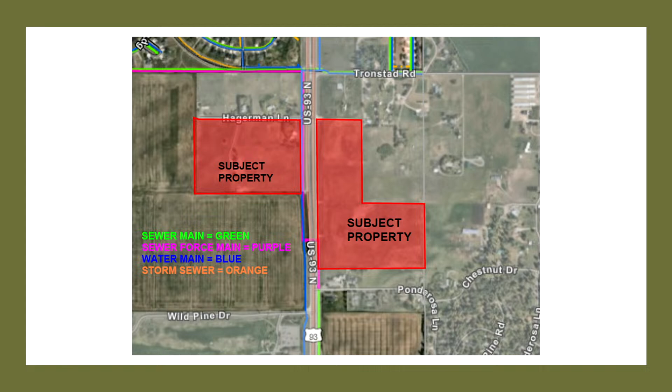With that, the Kalispell City Planning Board and Zoning Commission adopted staff report KA 2307 as findings of fact and recommended that the Kalispell City Council annex the property and that the zoning be City R4 residential. Be happy to answer any questions.

Any questions? There's two parts to this, right? Yeah, so there's going to be the resolution and the ordinance. Correct. Questions for all of it? I don't have any questions, but just that.

Okay, all right. At this point, I'll open it up for public comment. Any public comment wishing to speak, please step to the mic and state your name and address. Okay, seeing none, I'm going to close public comment and look to the council for a motion on the resolution. Ms. Gabriel?

Thank you, Mr. President. I would move resolution number 6174, a resolution to provide for the alteration of the boundaries of the city of Kalispell by including therein as an annexation certain real property generally described as being located on the west side of Highway 93 North to the south of Hagerman Lane and adjacent to the city limits on the south and west sides of the property, including but not limited to property addressed as 170, 180, 190, and 200 Hagerman Lane, and also including property on the east side of Highway 93 North, generally between Hagerman Lane to approximately 200 feet north of Ponderosa Lane, including but not limited to property addressed as 3327 Highway 93 North, and as further described on Exhibit A, to be known as Dusty Acres Addition number 468, to zone said property in accordance with the Kalispell zoning ordinance and to declare an effective date.

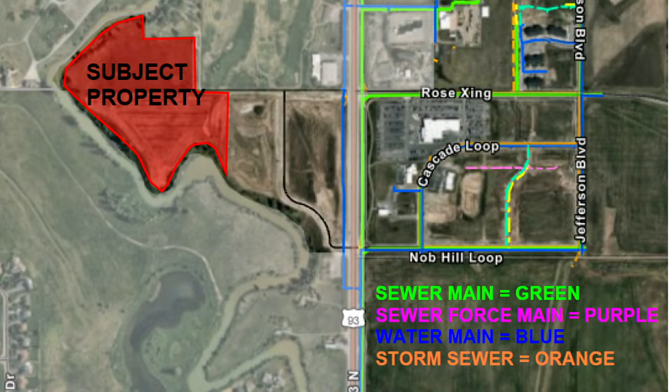Just a shot of the property. It is zoned RA2 with a placeholder PUD. The property is designated as urban mixed use in the growth policy, which is consistent with the existing zoning. The growth policy encourages a variety of residential development that provides housing for all sectors and income levels within the community. Under the growth policy, up to 40 units per acre are allowed.

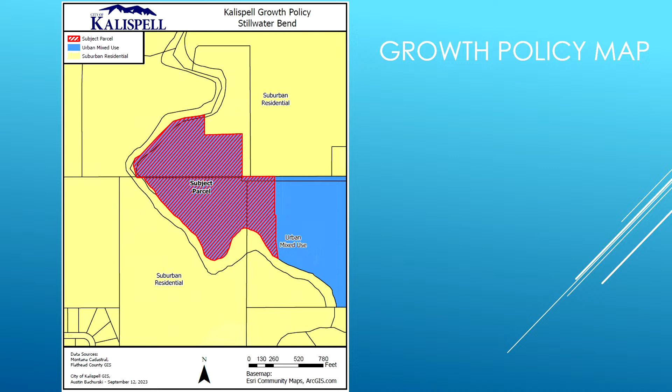The proposed density for the project is calculated for developable land only. In this instance, the 23 1/3 acres of developable land would generate 18.5 units per acre.

Under the subdivision regulations and fire code, a second access in addition to Rose Crossing must be provided once there are 100 or more units. Eventually, it's anticipated that Rose Crossing would continue across the river, with that extension providing the second access in the long term. A separate second access is necessary in the short term, and the plans show that it is part of the initial phase of Stillwater Bend Phase 2.

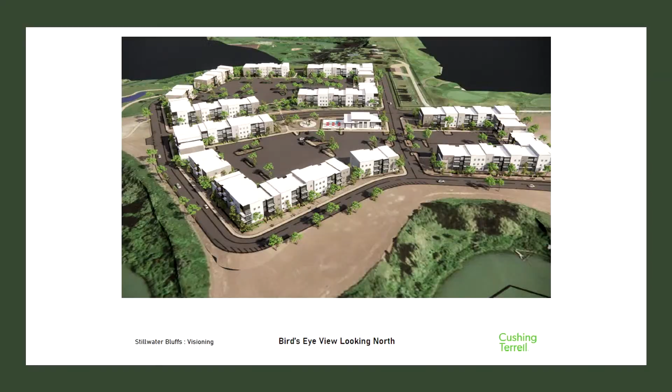This is a 3D image of what we were just looking at with that layout, along with some perspectives of the clubhouse, as well as a view running down Rose Crossing.

They did request 2 zoning deviations and 2 subdivision deviations. For zoning, there was a setback request to drop from 15 feet to 10. The reduced setback is requested to help accommodate site constraints relative to slopes, the river, and the 80-foot minor arterial right-of-way that bisects the property. The reduced setback to 10 feet doesn't interfere with the street or utility easements and allows for the urban appearance desired by the applicant. In this situation, the deviation request is appropriate.

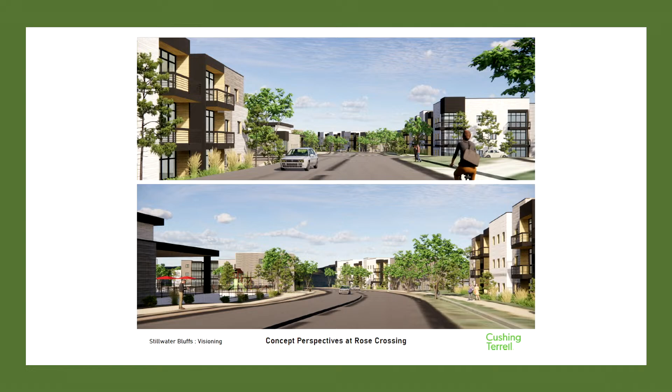The second deviation is building height. The RA2 zone has a maximum height of 45 feet, and the requested deviation would allow a maximum height of up to 60 feet for the buildings shown in the western portion of the development. The request is primarily to accommodate the natural grades of the site and to provide the option for tuck-under parking on those buildings. Additionally, the height deviation would allow a continuation of the varying roof lines shown in the proposed elevations. Building heights through the remainder of the development will be approximately 42 feet, and it would be appropriate to allow this deviation as well.

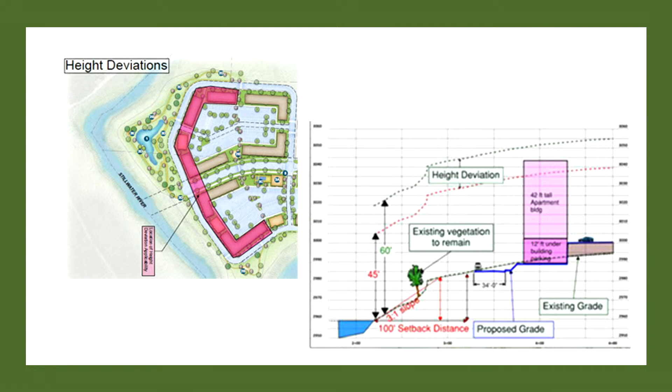The 2 deviations from subdivision regulations related to the setbacks from the river and access to adjacent properties. In regard to setbacks from the river, the subdivision regulations require a minimum 200-foot setback for impaired streams, including the Stillwater River. The setback is measured from the ordinary high water mark.

The setback can be reduced per the terms of the ordinance based on sound scientific information and reasonable mitigation to address potential impacts. In the case of bank stabilization, a geotech report shall be required. There were detailed findings relating to this aspect of the approval of Phase 1 of the development, which should be

reaffirmed in the Phase 2 findings and are outlined in the staff report. While there are riparian scrub shrub areas along the riverbank, there were no identified wetlands adjacent to the property and only the river setback would apply.

While Phase 1 is a separate PUD, the request is essentially for a continuation of the previously approved deviation that applied to the first half of the site due to similar site conditions and based on a 2017 geotech study of the full site conducted by Slopeside Engineering.

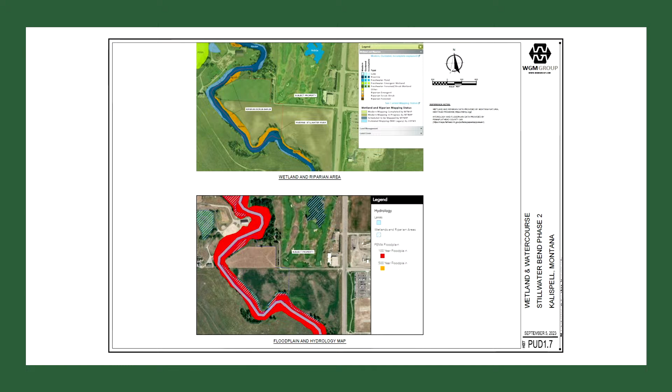The conditions of approval for Phase 1 included: A, allowing a reduction in the Stillwater River setback from 200 feet to the setback line determined by the geotech report, provided that the setback could not be less than 100 feet. B, requiring the 100-foot Stillwater River setback be restored with native riparian habitat. A landscape plan would be submitted by a specialist with experience in riparian area restoration.

And C, providing that as part of the engineering review process, the City of Kalispell would have the option to submit the geotech analysis to a third party.

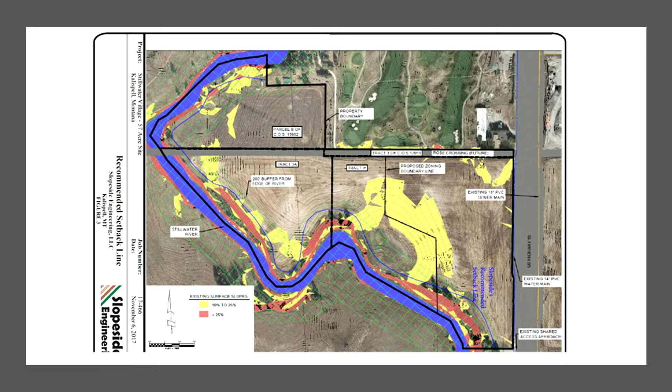This is showing the 2017 geotech as well as the current conditions.

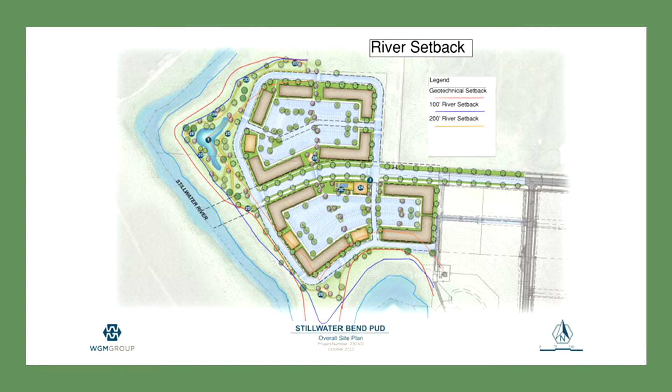As part of the application for Phase 2, the prior geotech report was reviewed by Slopeside Engineering and determined to still provide valid information. The applicant provided additional exhibits that add further detail to the Phase 2 area relative to the proposed construction. The exhibit here shows the recommended geotech setback in red, the 100-foot setback line in blue, and the 200-foot setback line in orange.

This exhibit shows areas where the development would encroach into the 200-foot area. It should be noted that trails, stormwater facilities, parks, and similar improvements are allowed in the setback under the subdivision regulations. So mainly you'd be seeing these areas in kind of that purplish blue coming around in those 3 locations.

And this exhibit shows the cultivated area within the 200-foot setback, which has occurred as close as 40 to 50 feet from the river and has contributed over time to its impaired status. The restoration plan required as a condition of approval would improve the current situation as it relates to the health of the riverbank due to the cultivation activities.

Additional information specific to the area of the development is still warranted to verify details related to the riverbank and slopes through the phase, and any updates to the geotech report required by Public Works should be submitted and subject to their review. Based on the additional information, adjustments to the site design, and a potential reduction in the number of units may result based on those updates in the reports.

Subject to the foregoing, it is appropriate to apply the Phase 1 conditions relative to the watercourse setback to Phase 2, and the deviation request is appropriate.

Lastly, there was the block length and connectivity. Generally, future street extensions to adjacent properties should be laid out at regular block lengths of no more than 600 feet. In this particular case, with the river extending through, they have the one connection with the bridge. Probably not reasonable to have additional ones and could impair the river more than you'd want in any case.

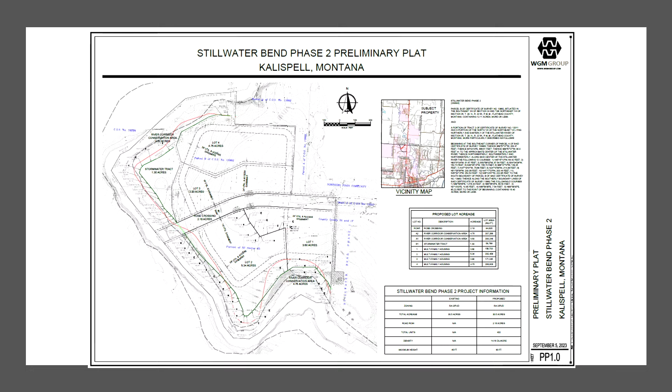This is just showing the plat and the phasing, with Phase 1 starting on the eastern end, moving to Phase 2, 3, and 4. Phase 1 would include that second connection, as well as the stormwater area on the western tip of the property.

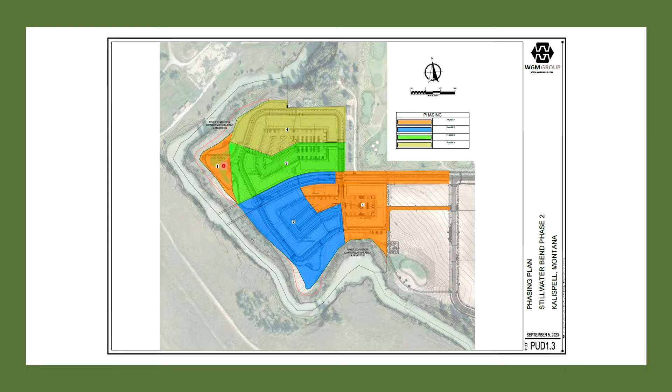No public comments were received at the public hearing other than those from the applicant, and the Kalispell City Planning Board and Zoning Commission did adopt staff report KPUD 2303 and KPP 2309 as findings of fact, and recommended that the Kalispell City Council approve the planned unit development and preliminary plat for Stillwater Bend Phase 2, subject to 35 listed conditions.

There were some slides that the architect and engineer for the project had to go through. If you would like to look at those either in the public portion or now. We do it in the public portion of it.

I think it's a really good presentation to put out there because it shows where the vision came from. We had done it one time before on one of their other projects too, and I think it's nice to have. So, are you guys good with that? Okay. So with that, if there's any questions, I'd be happy to answer those too. Any questions?

Ms. Dahlman? Thank you, President. I mean, you probably don't know this, but...

When would Rose Crossing possibly cross that river? I guess it's a little speculative at this point. Nobody's been in to talk to us about that. There's a gravel pit over there, and whenever they try to remediate that, you'd probably see something extend through at that point. So it's probably quite a ways down the road. Okay, that would be a public project though, right? Not a privately funded effort. In some ways, it's hard to speculate because you don't know what the plans would be there in the future.

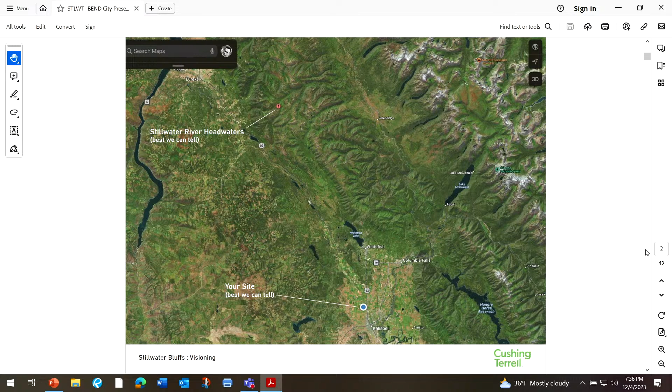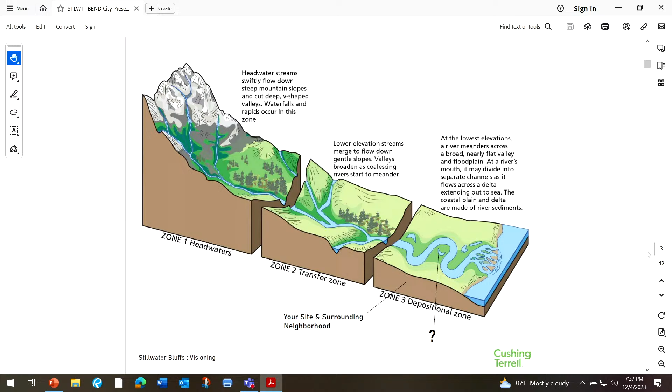We noticed some interesting little curves and things. The next slide shows what those are. Those are oxbows—a lot of people are hunting ducks and things at oxbows. There's a few around our site, and there's even one basically on it. We started thinking architecturally, how can those shapes actually help shape to some degree what the buildings might look like?

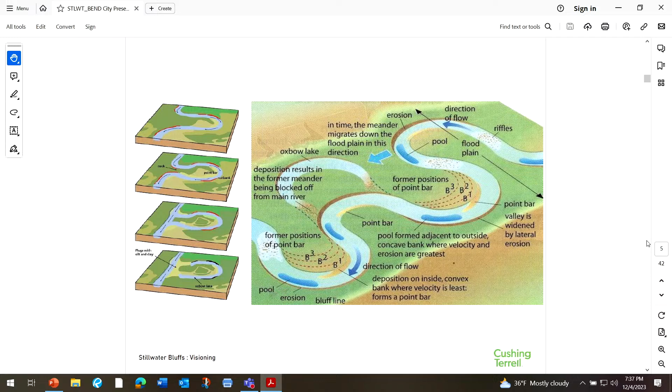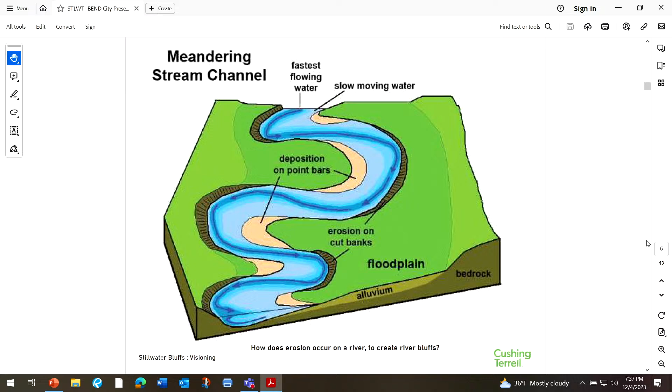It's kind of interesting, and the next slide shows how the river naturally speeds up as it wraps those outer curves, and it actually erodes and creates those cut banks, if you will. We thought maybe there's something we could learn from banks as well as we think about the architecture. So we got some cut banks as well—areas where, in fact, Geotech even said some of these you got to stay away from because naturally this is where the river is going to continue to carve away. We just got to be careful of that.

We also just looked for fun at research of how other people are dealing with riverfront properties. We haven't quite gotten to the design here yet, but just know we really want to focus—we have a lot of land that's right on the water that we actually can't develop, so we're just going to develop it into fun green spaces as time goes on here. It's going to be really exciting to do that.

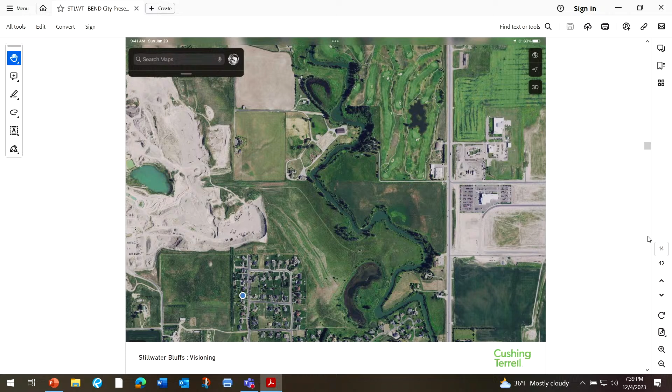This goes back to the base, and then as you flip ahead it starts to show some squiggles, and the purple lines start to show curves and things, thinking what can we do on our site that we can utilize that form, that sort of external form. You can see almost the form of an oxbow—it actually kind of creates this panoramic look, if you will. It pretty much represents a panorama, and it also encloses a space inside it. We started to think, how can you use that?

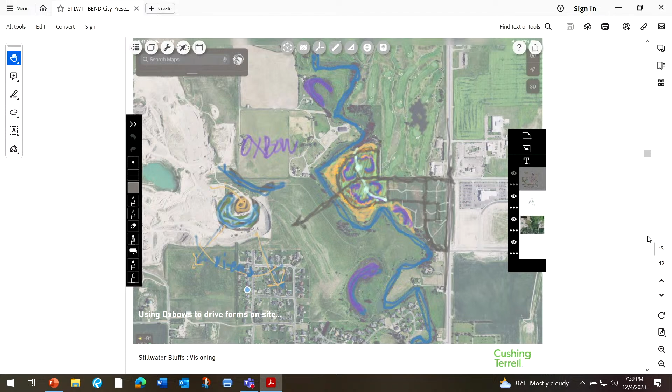We flip to the next one and work it into geometries as opposed to curves, because as we know, curved forms are much more expensive than square forms. So we didn't want to do a bunch of curves as much as the architect wanted to—the owner didn't want us to do that.

So we started looking at other forms that are actually constructible, and how do we push those forms right to the edge? What you're seeing here is essentially a ring of architecture facing the waterfront, the mountains beyond, and even up to the north and northeast to Glacier and Whitefish Mountain. The best way to take advantage of the views is to wrap the edges of these sites with the buildings, and we'll do our best to contain and create some beauty.

The buildings are far enough away that I think even the views that are internally focused will be able to look between and beyond and above the buildings because of the distance. So it's just a different way to look at it as opposed to building, parking, building, parking, building, parking. Let's find a way to take advantage of the site.

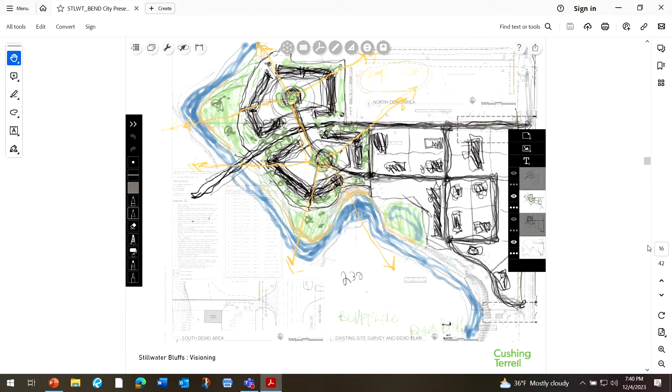So moving on to the next one — I'm surprised you didn't flip ahead, PJ. That's intentional. This is just showing, stepping through literally. The light green represents a certain grade, and then we start dropping down and down. You can see the dark green is area we aren't even touching with buildings because it's just too low.

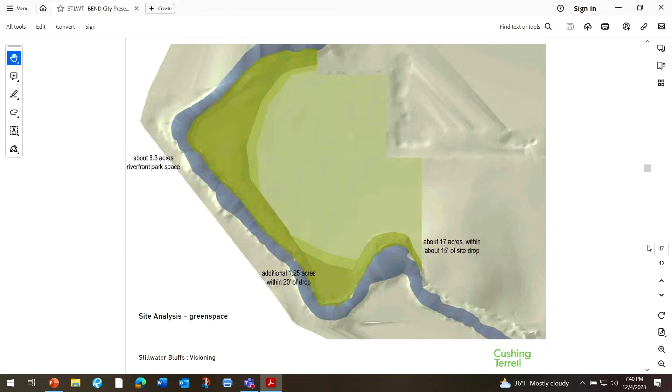So a great deal of acreage is being devoted to green space. The next one shows geotech, basically where we've been told to stay away from because of the erosion. The next one is showing how we're dealing with connections and traffic — these are the ones mentioned earlier by PJ, where we're going to be plugging in at least two locations. Everything else is internal circulation.

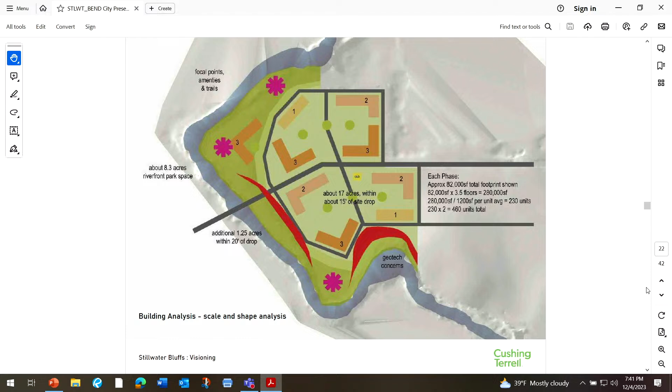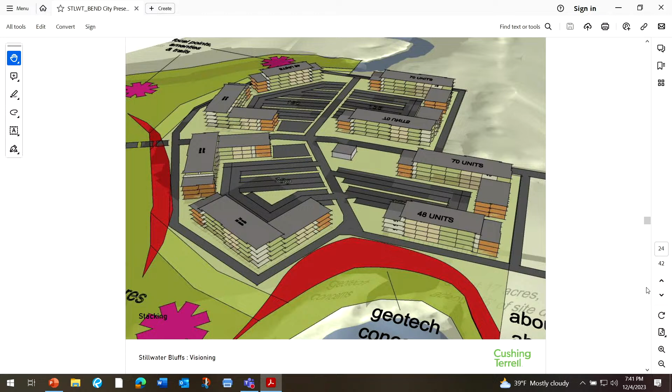So the next slide shows if you break these into bite-sized chunks, and the next one even into chunks where they're about looking at three different building types instead of six or seven. So the next one starts to look at what if you mass this up into three or four story structures, and then the next one is some test fits, seeing how many units you can get there. And then we work our way into some character.

Here's a view where we start to, once we know what we're going to build in terms of scale, go back to our images and start to see — I'd challenge you to look and say, do you see some of the horizontal lines, some of the vertical breaks, and even some of the color we can potentially put in the windows to represent the fall colors that are seen there? All in an effort to make these buildings look like a vertical extension of the bluff line they're built upon. So that's what we were thinking when we did this.

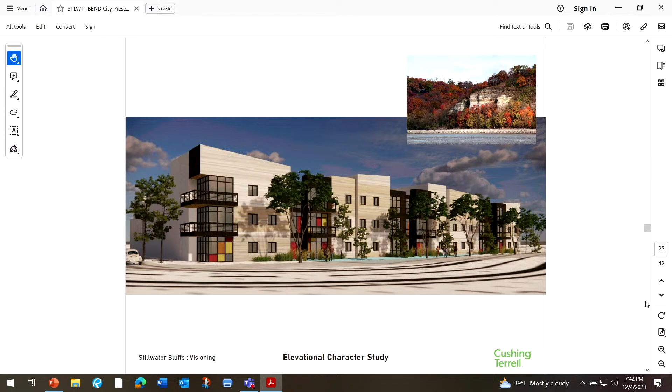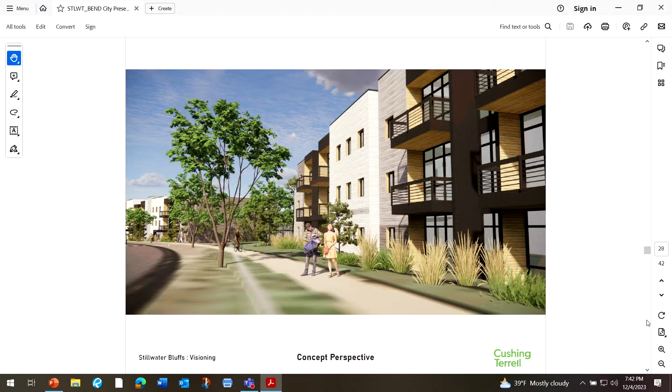The next ones are just 3-dimensional views, you can flip through those. I think you already saw them, but that one we're trying to tighten up just a little bit more — that's the one on the main arterial there, where we do make it a little tighter intentionally. I think that's about it.

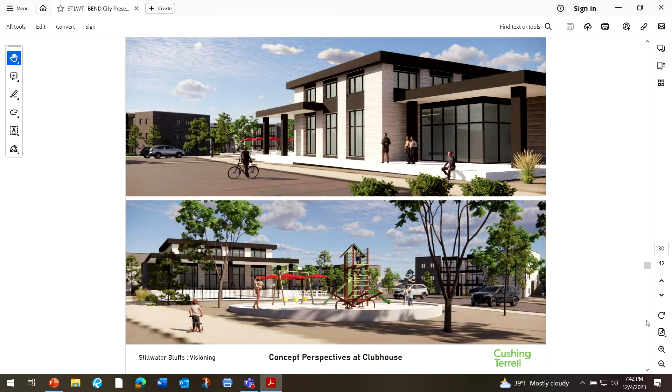There's another one that shows the clubhouse — we're just kind of playing with the clubhouse at this point, but a much smaller scale version of the regular other buildings. So I think that's it for me.

I'm going to let Ben come up and talk a little bit about the site and the engineering side of things. So any questions, just let us know.

Thank you. Thank you.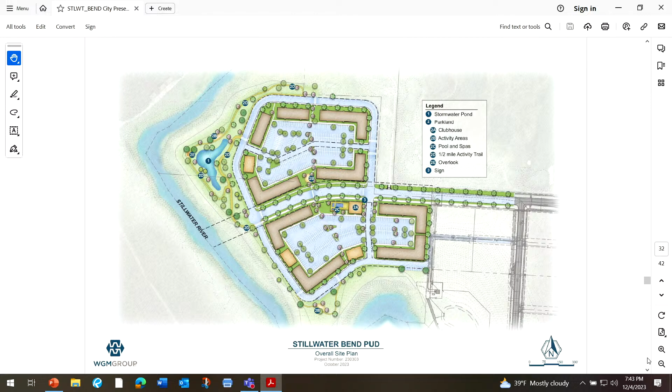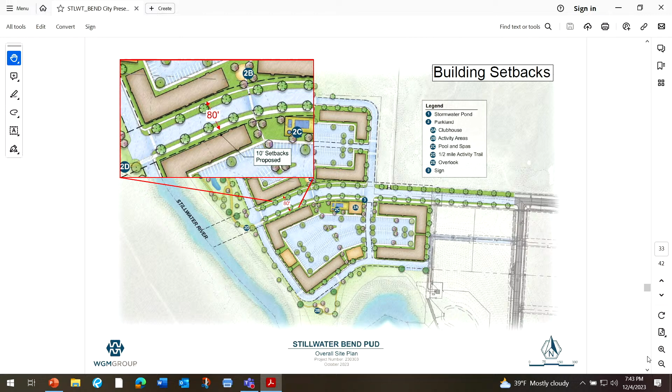The next zooms in a bit to the 80-foot building setback, or the 80-foot right-of-way, where we're going from a 15-foot setback to the 10-foot setback, and that allows what David was talking about, where we can have that more walkability appeal for those buildings that are fronting Rose Crossing. The next slide here is for the height deviations.

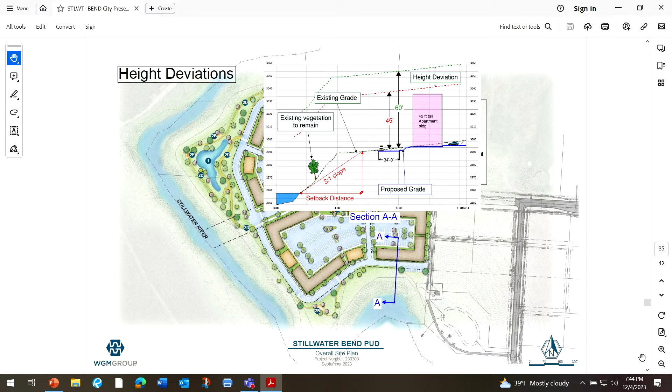It's just for those buildings that are on the western side, and that's mainly for the slopes, so some of the buildings can get built up as the height deviation. The next slide shows that. The 45-foot height limit is exceeded on the buildings on the western side because of the garages that are going to be under the buildings for parking. On the next slide, PJ, you can see they're 12 foot under the 42 tall foot building, which extends above the 45-foot into the additional requested deviation area.

The next slide shows a bit of the river setback. You can see the red line is the geotechnical setback that Slopeside provided with their analysis, and with that analysis allows for adjustment for 3-to-1 slopes within that bank. They're kind of hard to see, but you can see some of the contour lines where it does get steep along the river edge there.

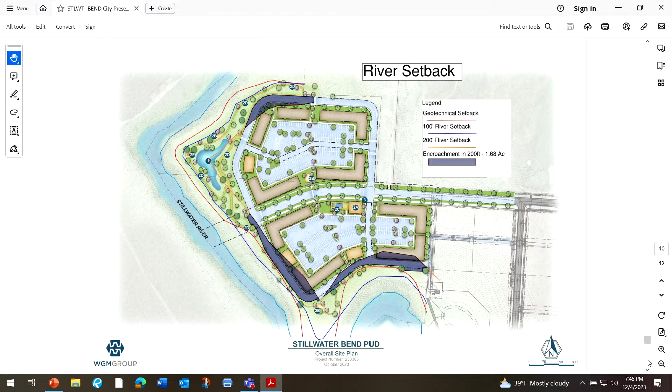Next slide. This also goes in a little bit more detail on the setbacks, showing the 100-foot river setback along with the geotechnical setback. I believe the next slide shows the 200-foot setback along with the 100-foot setback and the geotechnical setback. Next slide. This was part of PJ's presentation, which shows where we are encroaching with the buildings into that 200-foot river setback. It also shows the 100-foot river setback in addition to the geotechnical setback.

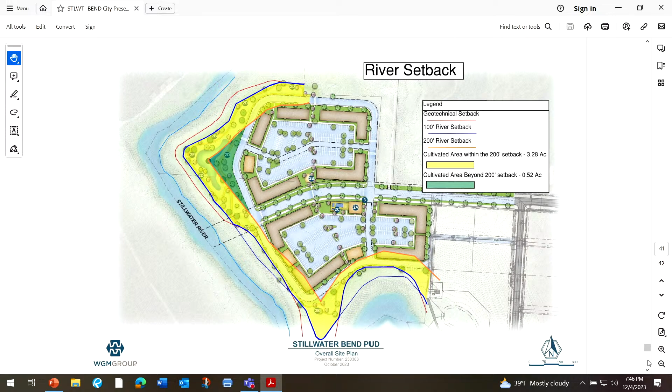I believe this final slide here shows where we are following along the dark blue line, which would be basically the edge of that cultivated area combined with the geotechnical setback. I think the final slide is where we have the proposed setback. This doesn't show the development. The orange line is the 200-foot setback, but this is all going to kind of be similar to what has happened in phase 1, which you can see under construction on the west side, where we're going to be -- I don't think you can see it on this, but in the recent Google Earth aerials, you can see where they've rehabilitated some of the disturbed area within that 100-foot setback.

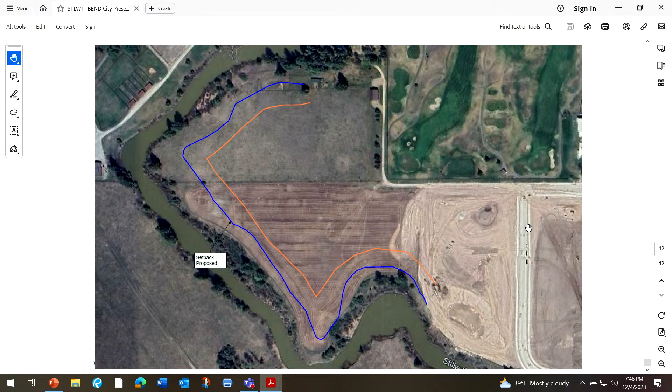So happy to answer any other questions that anyone has. Otherwise, thank you. Thank you.

Is there any other further public comment? Okay, seeing none, I'm going to look to the council for a motion on ordinance 1917, the PUD.

Is it 1917? Mr. Dowd. Thank you, Mr. President. I move ordinance number 1917, an ordinance to amend section...

27.02.010, official zoning map, City of Kalispell zoning ordinance number 1677, by creating a residential planned unit development to be known as Stillwater Bend Phase 2 PUD over certain real property, more particularly described as Parcel B of Certificate of Survey number 13982, situated in the southeast quarter of Section 24 and the northeast quarter of Section 25, Township 29 North, Range 22 West PMM, Flathead County, Montana, and a portion of Tract 3 of Certificate of Survey number 12011, and a portion of the north half of the northeast quarter lying northerly and easterly of the Stillwater River of Section 25, Township 29 North, Range 22 West PMM, Flathead County, Montana, and as more particularly described on Exhibit A in accordance with the Kalispell Growth Policy Plan-It 2035, and to provide an effective date.

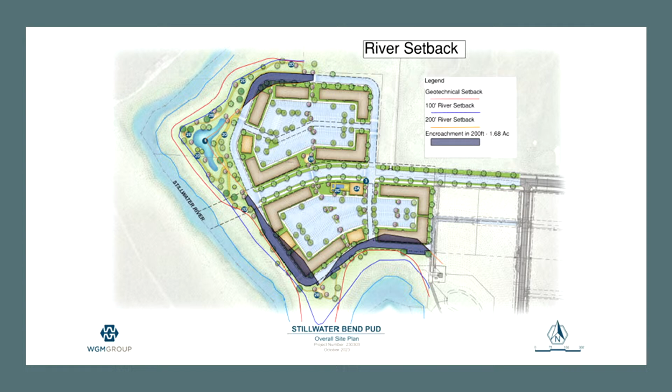Can you rephrase the question just so I understand correctly? I guess I'm hearing what my partners down the way are saying with having a hard time justifying the shorter distance from the river. How do you justify that you're going to still be able to protect the river? I mean, those guidelines are there for a reason. What's your justification for making them less, other than being able to put up more units?

Yeah, so one of the things that we did look at is, I believe there's a slide that shows the current cultivation and then turning it into actually a riparian area. That yellow area is the current cultivated area that is farmed. So what we'd be doing is, we're basically encroaching on an area, I think it's 1.68 acres.

But then what you gain in consideration is a significant amount. So we're encroaching on the 200-foot setback, but one could argue that we're going to repair and bring forward more acreage that could be used for habitat for birds or wildlife. So I think it's a net positive for the city, and that's how we justified it. Yes, we are encroaching in these areas, but when you look at the net, we're actually adding to the ecology or the environment by adding that area.

Okay, so that yellow area is already being farmed and cultivated and has equipment going over it? That is correct. Okay, thank you.

I just want to note that the Fish, Wildlife, and Parks input is not a regulation, it's a recommendation. It does matter, because there's no state regulation, river setback, or anything like that - it's a general recommendation. We did send this to Fish, Wildlife, and Parks, and they didn't comment on it. Every city has a different setback. Whitefish, for example, their setback is 75 feet and/or the top of bank.

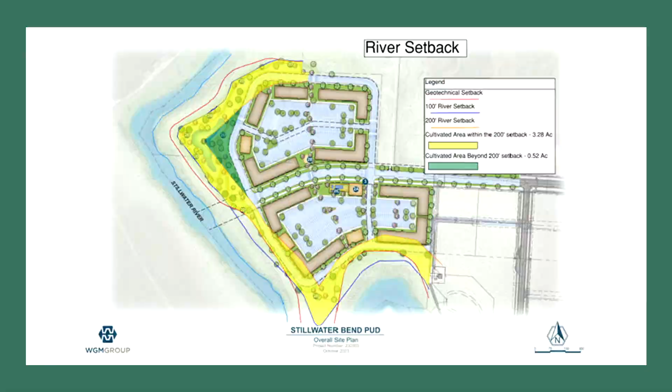Mr. Donnelly? Thank you, Mr. President. Just a quick question to follow up with that - down on this lower portion where it really comes into that one building, how high up above are we out of the floodplain at that point? Yeah, this is all well above the floodplain where development's going. That's what I figured, just wanted to check.

Well, I think where I'm at on this is a couple of things. I know that in the past we've had developments come in where there's possibly areas of that terrain that are impaired, where the development of the lot can actually go through and repair some of the defects of the lot. I kind of see some of that happening here. So that's a good thing.

The other thing is, as far as the bridge goes, it's part of our transportation plan. We have a transportation grid in this valley that people drive all the time. There's bridges all over this valley. It's about getting people around the valley, connectivity, and I hear what you guys are saying, and I respect you for that.

But the thing is, like Ms. Dahlman, you said you're going to choose the river on this one, and I respect that. But where I'm at with it is I'm going to vote to house people. I look at this piece of property and I see that what they're doing to it is going to repair some of it, create more habitat, and I think it's a well-blended approach to dealing with that setback, that recommended setback.

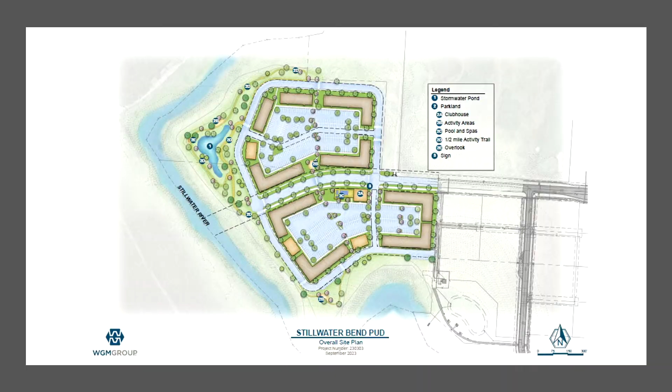I guess that's how I would put it, speaking for them. I've spoken to them about how they don't have time to review everything that comes to them with the depth they would like, maybe. So it's speculation, more based on some conversations I've had in the past with them.

And again, that 250-foot recommendation from them is based on a vegetated buffer. So I very much appreciate they're going vegetated. I'm glad we're getting revegetation rather than 100 feet without vegetation. It will be a certain improvement, and I'm very glad that's the case. But the 250-foot recommendation, based on the science from Fish, Wildlife, and Parks, my understanding, is based on a vegetated buffer.

Mr. Dowd: Thank you, Mr. President. I just feel like I want to throw this out there. It's counter to kind of what everybody's talking about here, but I feel that a lot of these concerns are best addressed at the planning board level when these come out, because at this point these gentlemen have done a lot of work to get to this point, and this is after they've been through the planning board process.

And it may be pertinent that they would take a closer look at some of these concerns and maybe alter the plan slightly, but back when they're developing the plan, instead of after the plan's already created.

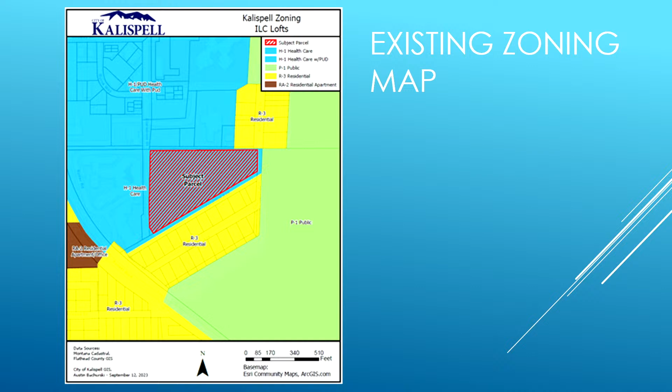And it's the shot of the property where it would be going. As I mentioned, it's zoned H1. Residential care homes and facilities, as well as multifamily dwellings, are both conditionally permitted uses in this district, and rezoning the property is not necessary for this proposal. The growth policy shows it as urban residential. The growth policy in Chapter 4A on housing encourages a variety of residential development that provides housing for all sectors and income levels within the community. Additionally, infill development is encouraged to lessen impacts on sensitive lands and provide additional housing opportunities where services are available. As I mentioned, city services are available with water, sewer, and streets in the vicinity.

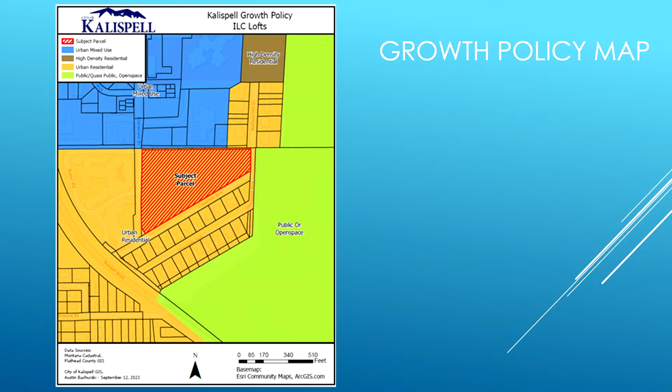As shown in the site layout, the lighter gray is existing. The darker gray would be the new addition coming on. They would have 40 parking spaces inside the structure, accessed off of the alley coming in from the north. They would be creating somewhat of a courtyard, and they'd have to address some building fire code exiting as part of creating that courtyard area.

In relation to parking, under the zoning ordinance, both elderly housing, which this project does qualify for, and assisted living complexes require 1 space per 2 dwelling units, and convalescent nursing homes require 1 space per 8 beds, plus 1 space per employee on the maximum shift. The applicant submitted a parking calculation showing a minimum requirement of 86 parking spaces - 16 for the existing number of beds, 50 for employees, and 20 for the new units - with 117 parking spaces provided on site, thus exceeding the minimum requirement. The parking design and number of spaces would be reviewed as part of the building permit and site review processes to ensure compliance with the zoning ordinance.

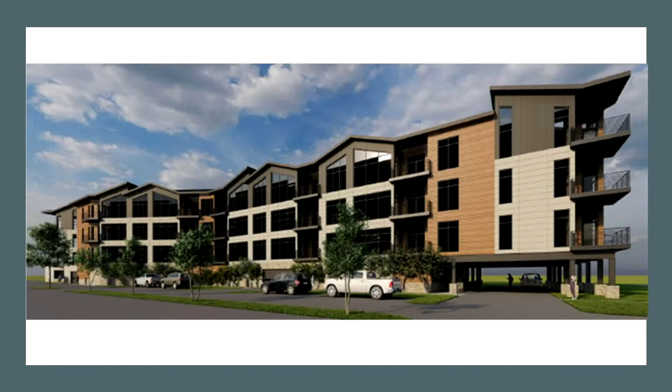Design standards in the zoning ordinance would apply setbacks and lot coverage standards, and the proposal as shown can meet those standards, although those would be verified during the building permit process. The H1 zone has a 60-foot maximum height by right and unlimited with the CUP, which was included with the application. Additional height is generally appropriate when the request is based on improved design of the project and otherwise meets code requirements. Assuring there is adequate parking on the Immanuel Lutheran campus so that it does not spill into adjacent residential neighborhoods is critical in this situation. Given the built environment around the property, the most economical and efficient use of space is to include parking in a garage under the building, which adds to the height versus more surface parking on site.

In this instance, the parking garage and pitched roof design are elements which enhance the aesthetic design and functionality of the project without unduly impacting adjoining properties beyond any impacts from the 60 feet allowed by right.

We did contact Logan Health regarding the alert helipad, and they didn't anticipate any impact on their operation, and there are no city codes which would require any mitigation steps. There is an FAA advisory circular regarding obstruction marking and lighting, which does contain certain guidelines, and it's recommended that the applicant familiarize themselves with those and follow them.

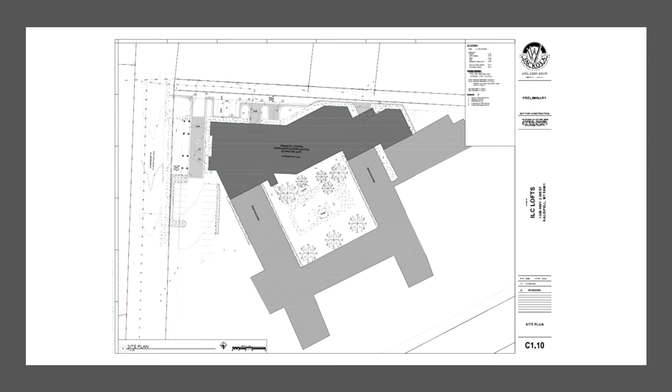We did receive some written public comment at the public hearing, but no verbal comments were received at the public hearing with the Planning Board. With that, the Kalispell City Planning Board and Zoning Commission adopted staff report KCU 2305 as findings of fact and recommended that the Kalispell City Council approve the conditional use permit for both the expansion and the additional height up to 68 feet, subject to 10 stated conditions, and be happy to answer any questions.

Any questions? Mr. Hunter? Yeah, thank you, Mr. President. PJ, could you review, I believe we have some standard measures that protect the city if halfway through the building project, the developer goes under, the project sponsor financially has trouble completing the project — can you review some of those safeguards we have?

Well, one thing we don't have is any safeguards, and we don't review any of their financials as they're coming through. That's a private matter that's on their side of things to look at. If somebody's asking for a certificate of occupancy and some things aren't completed — for example, right now the asphalt plants are closed and they can't finish some of the site work or do landscaping — we'll get a performance improvement agreement, similar to what we do with subdivisions. They'd post a bond and a completion date within a year to finish up those site improvements. But we don't have any type of process, and I don't think we really can have a process to check their financials or anything along those lines.

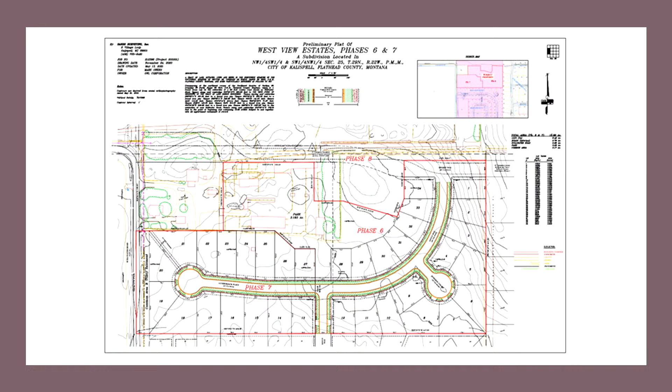City Council approved the preliminary plat with 26 conditions on June 21st, 2021. All of the conditions have been met or adequately addressed. All infrastructure has been installed and accepted or bonded for. A subdivision improvement agreement for both Phase 6 and Phase 7, in the amount of $23,150, secured by an irrevocable letter of credit, is included for the council's consideration. Additionally, cash in lieu of parkland in the amount of $54,000, covering both Phase 6 and Phase 7, was submitted by the applicant. And it's showing the plat for 6 as well as 7.

With that, staff would recommend that the council approve the final plats for Westview Estates Phase 6 and Phase 7, as well as the subdivision improvement agreement and cash in lieu of parkland, with separate motions for each. Happy to answer any questions. Questions? No questions. I'm going to open up for public comment. No public comment. Look to the council for a motion.

I can take a stab at it, Mr. President. Mr. Dowd: Mr. President, I move that the city council approve the final plat for Westview Estates Phase 6, as well as the subdivision improvement agreement and cash in lieu of parkland. Second, seconded by Ms. Gabriel. Any discussion?

Mr. Hunter: Thank you, Mr. President. I believe, and I'll be speaking both to Phase 6 and 7 here, when this first came before us as the preliminary plat, I did vote against it, if I recall. I was concerned, as I often am, about sprawl in the community and kind of larger lot sizes, bigger than what I consider urban lot sizes. I sometimes carry over my protest votes to the final plat, but I will be contented this evening on that initial vote and reference it, and go ahead and support the final plat.